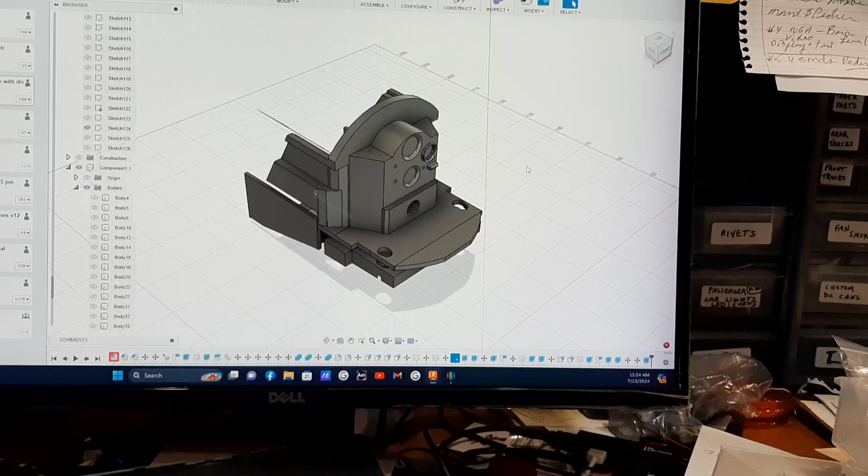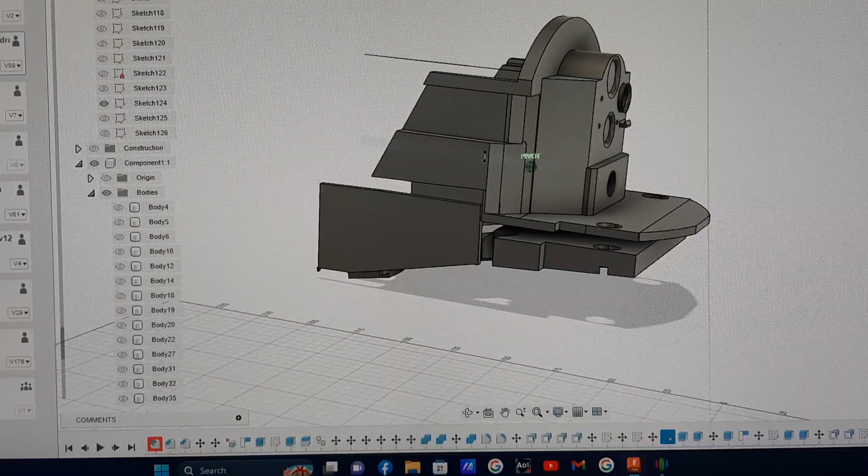Well, I know I say that a lot, but I think I finally got my head screwed on right today, and I fixed the issues, and these are the final pieces, in my opinion. I'm doing a print now, and I'll show you how I had to print it in a moment. But one of the things I had to correct was that the sides of the pan had to go up clearly.

Okay, I mean that's like duh. And I just lost my brain. I don't know what happened.

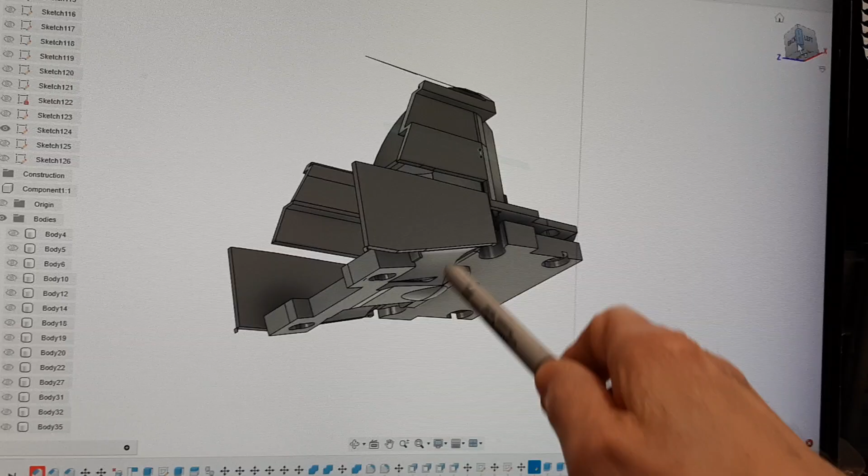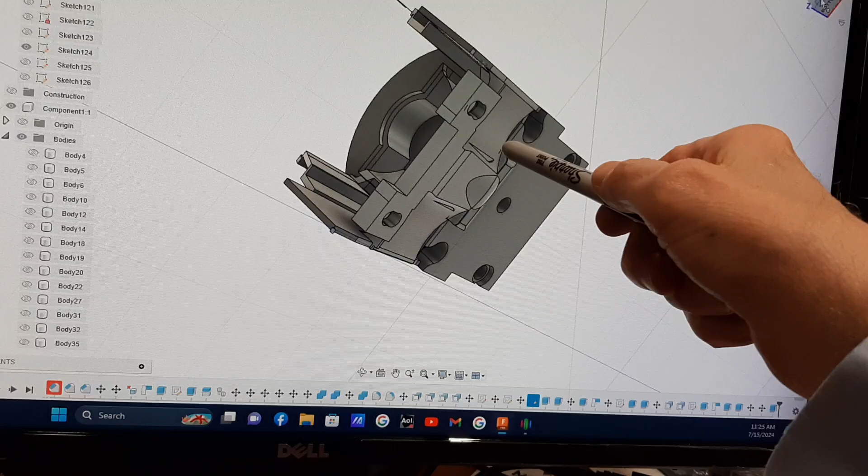So I flushed this edge to the bottom of the pan, and what you'll see with the bottom of the pan are those radiuses in here. These little arcs in here are for the pivot of the wheel. Pivot point is here, and the truck is back here, and the wheels sit here, and they go like this. And the high point is in here, but they'll clear now nicely on the turns. They won't bind in any way, and I'm still covering the bottom of the compartment, which is what we wanted. We wanted it to look like it was the ash pan.

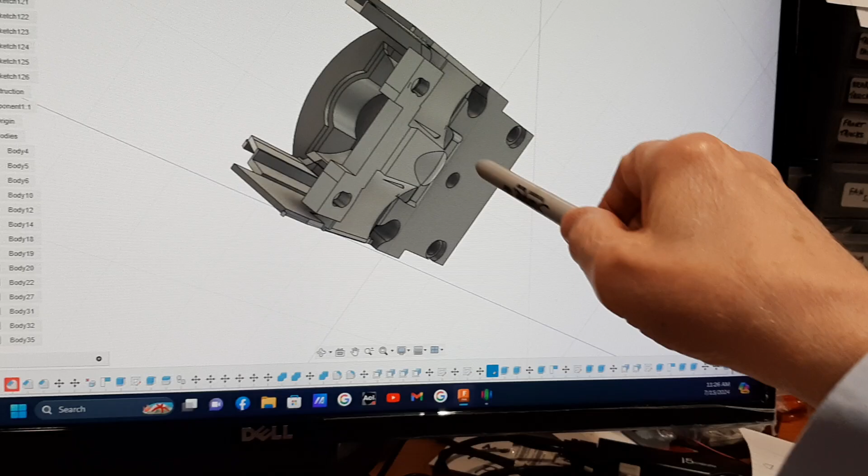The only issue with that was I needed some strength, so I added a beam like a rib or something in here for strength, and I also added a pair of holes out there for the cable harness to come out of this hole and then go forward and plug in. So now I'm looking at, do I need a clamp or something to hold that steady in that time frame?

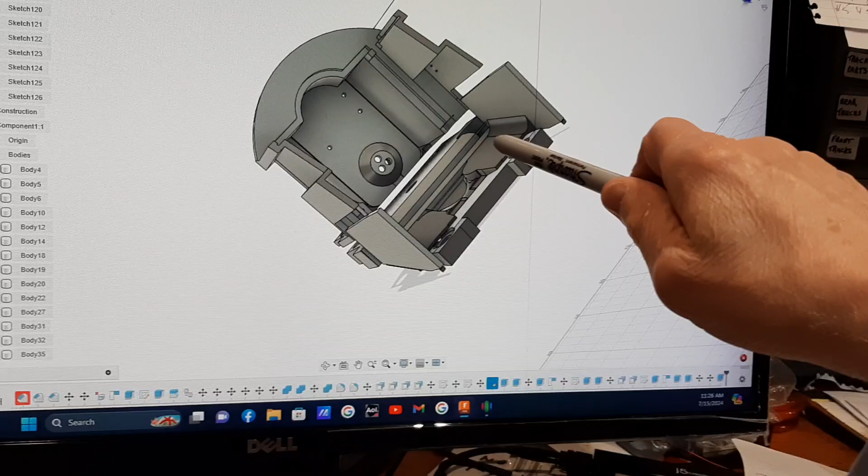Okay, so the plates go up now, and they're gusseted on the inside. You can see a nice bead of plastic there to give that more strength. It's only 1.5 or 2 millimeters. It's not a big plate. It's only for aesthetics, right? It's not holding anything.

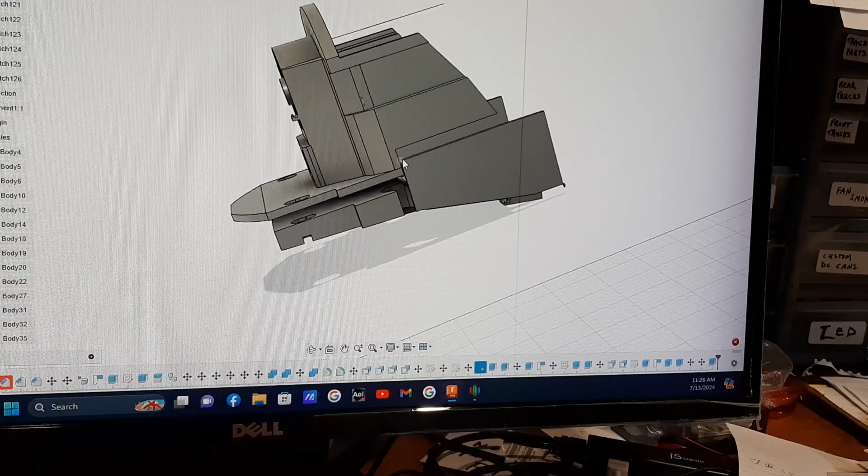Then I had to do some kind of a marriage between it and the Firebox, and I was looking at the lines and where the lines needed to be. And what I decided to do is this line here was fairly easy to line up. It was this line here that was giving me the grief, so I just took a notch out of the Firebox and fitted it into here, and then I did some sort of a match cut kind of a thing. It's where you overlap them and then cut a line, and then there, now you know they got a perfect fit. I kind of did that with this, so they should line up really close.

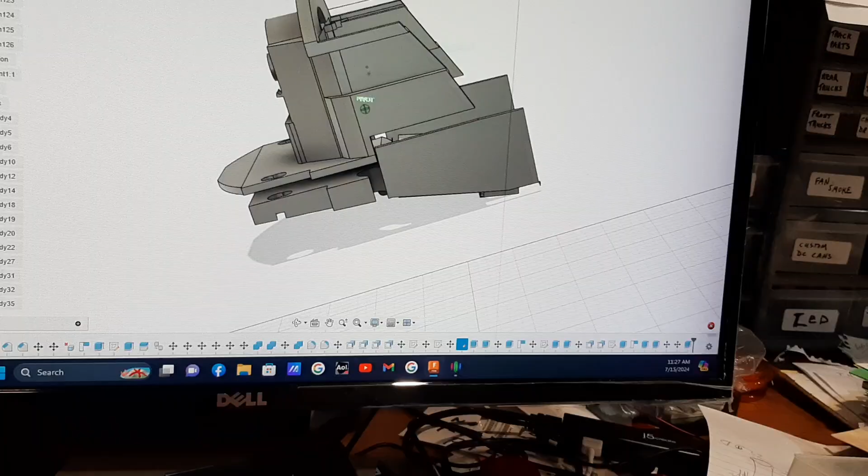You won't see it. It's up under the engine. It's not visible at all, but yeah, somehow it couldn't just be a goofy gap. It had to be, you know, okay. Now that being said, I could lower this window even more if I wanted to. There's nearly no reason. The window height is here to here, and you're not really going to look in and see anything. I did do a chamfer.

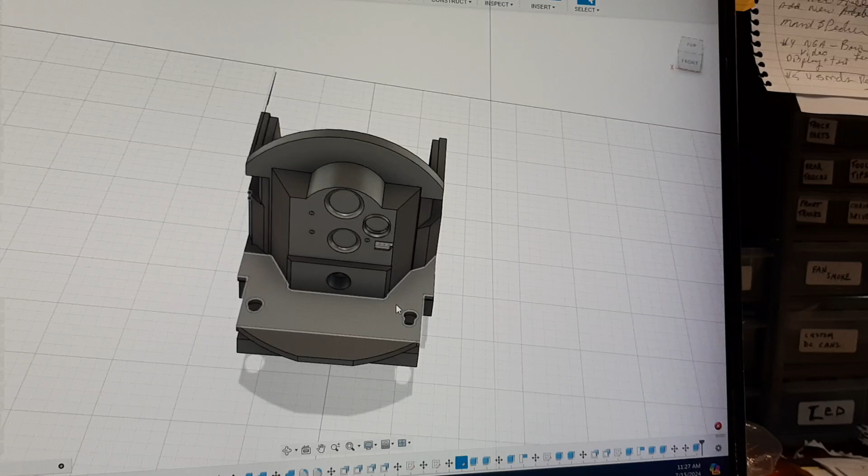Someone's asking about opening up this box, and I pushed it back as far as I could. So there's now more room for the engineer to sit and be able to do some controls and still look at this line of sight. His line of sight is going to be pretty good going out. There's a big window right here and another one behind it, so he's going to be able to see it. But he can also see down, all the way down, and see out the little porthole at the other end. We'll have to get some videos of that to make that clear to everybody, but I think that's going to work out.

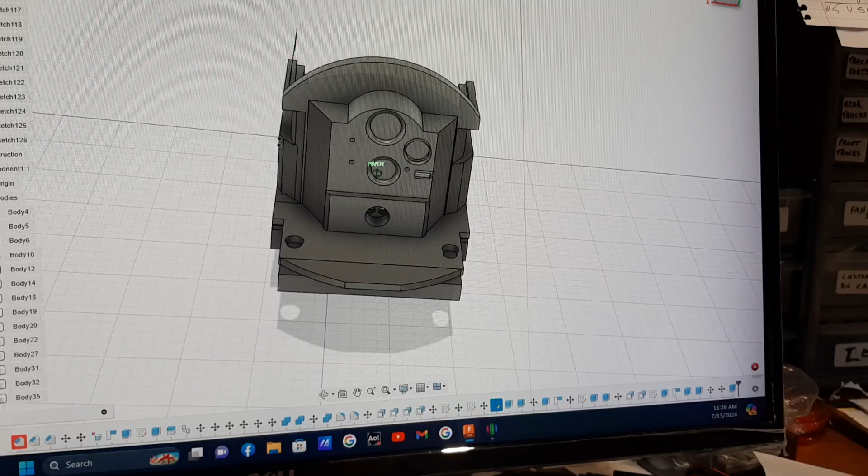So then I left the details. I got this stick hanging off. I can't get rid of it. Don't know what it is. I just ignore it. It doesn't print. It's so small, so fine. I know, a little weird. I've got a few sketch lines hanging out. Don't know why. There, he's gone now. In any case, I think I'm going to be in good shape.

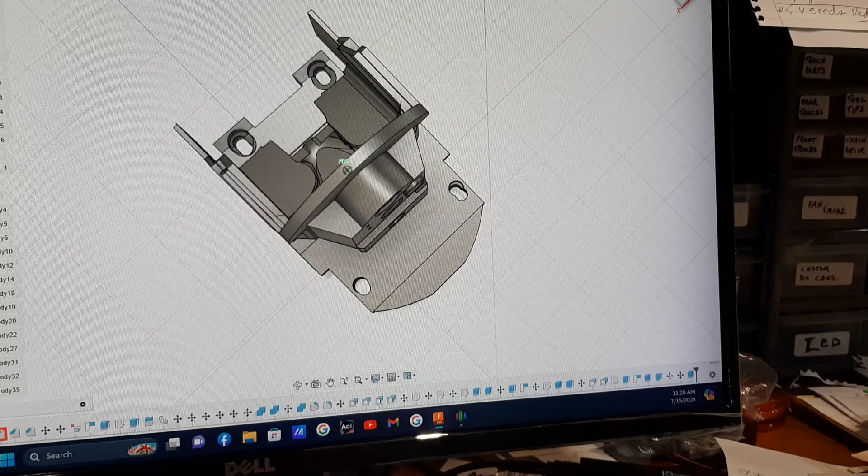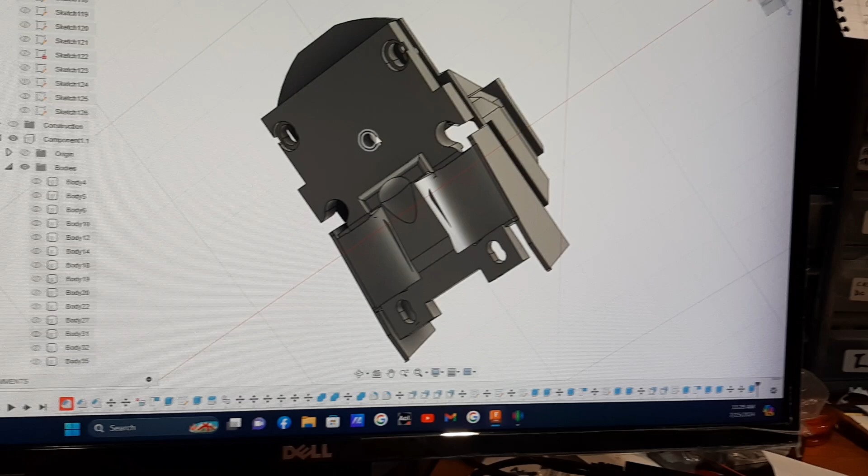I wish I didn't have this notch missing. I probably could shrink that countersink a little bit, and then that would go away, but I'm not sure I'm worried about it. This is the hole for the threaded insert, where you press in that bronze piece and then you bolt your truck to that. And I was thinking if I needed something to hold these down, maybe there was something I could leverage off of that would come out and still offer some pivoting motion, you know. I'm not sure if that makes sense. I don't know.

We'll see. I'm thinking maybe more something that's rigid. Maybe I put a hole here and something that reaches out to either side and just sort of acts like an arm to hold them up. Not too big, not too bulky. Anyway, that's the size of it.

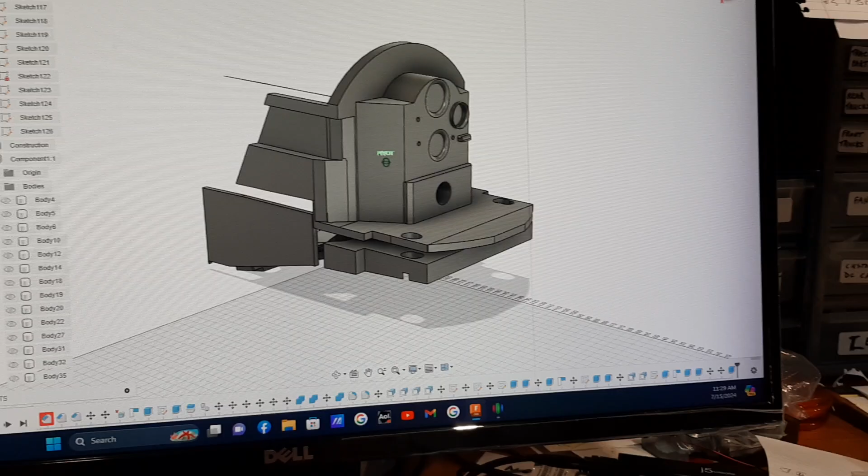So that took a while. In my head, for some reason, I was just struggling. Oh God. At any rate, that's it. It's being printed. On the challenging side, the thing I've been having problems with when I print was the area of support. It's printing now, so you're not going to see it, but I can make it print faster. Sort of just do that.

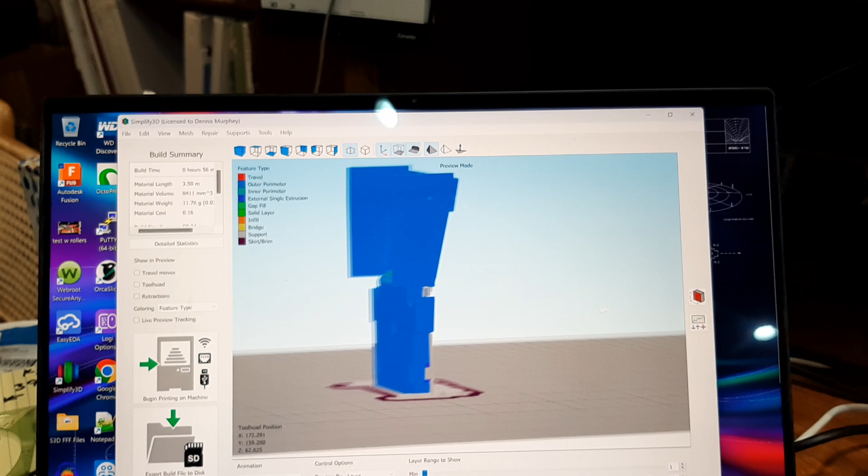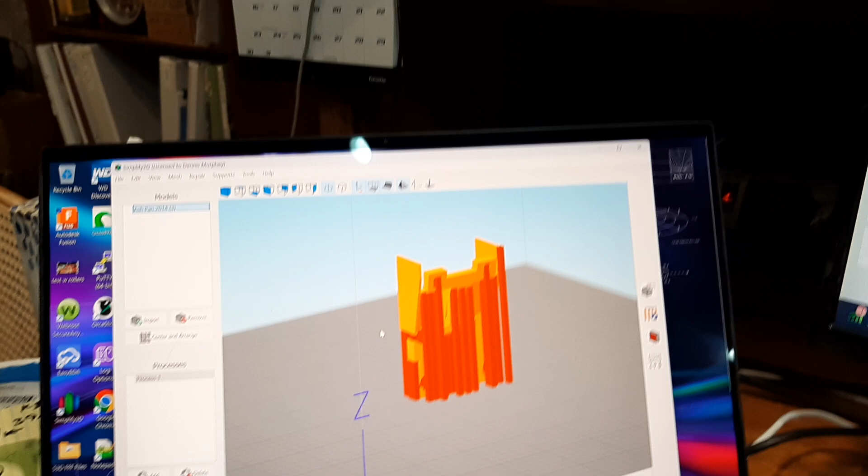And what I've done, and you'll see them, is I've added numerous, well, they're supposed to be there, and they're not showing up. Oh, that's because they're not printed. I'm only showing the part. I should probably get out of that. There we go. So now what I can show you is the whole thing. There's the whole part. And the orange are what we call supports.

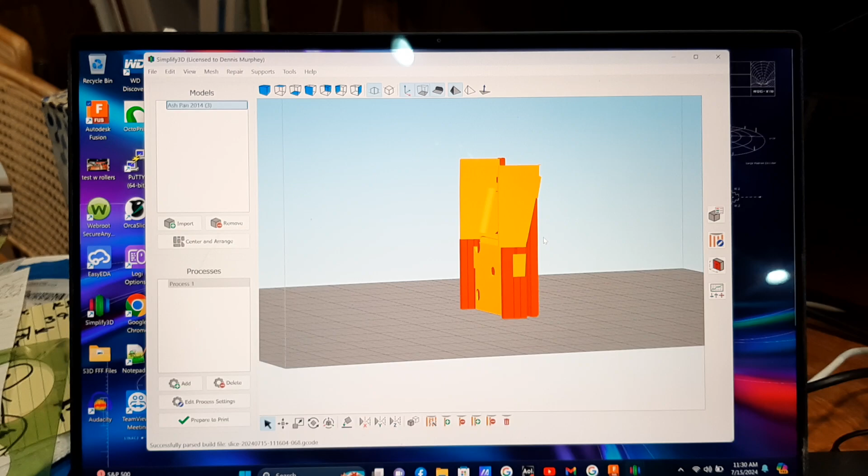I had been printing it flat, and I just was getting terrible finish on this bottom plate because it was hanging over. It wasn't finishing well at all. This plate was coming out great, and this one was coming out poorly. So the machine asked me to put it vertical. I thought about it, and I said, okay, let's look at that. And then I can add supports.

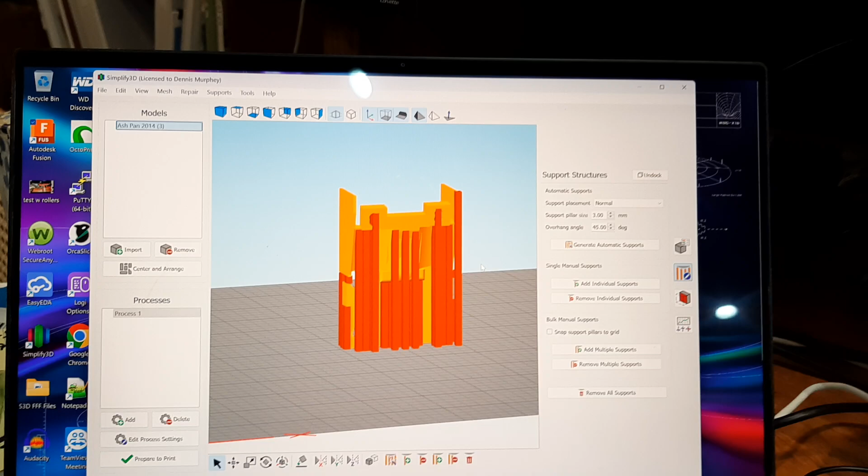There's my support button. And when I do that, I can add individual supports. So I said, okay, you do yours. And then I saw some spots, so I added a few of mine. And I feel pretty good about how it's going to get supported. These are going to be very thin, and they're just barely touching, and they snap off, usually, if you're lucky. We haven't perfected this notion of supports.

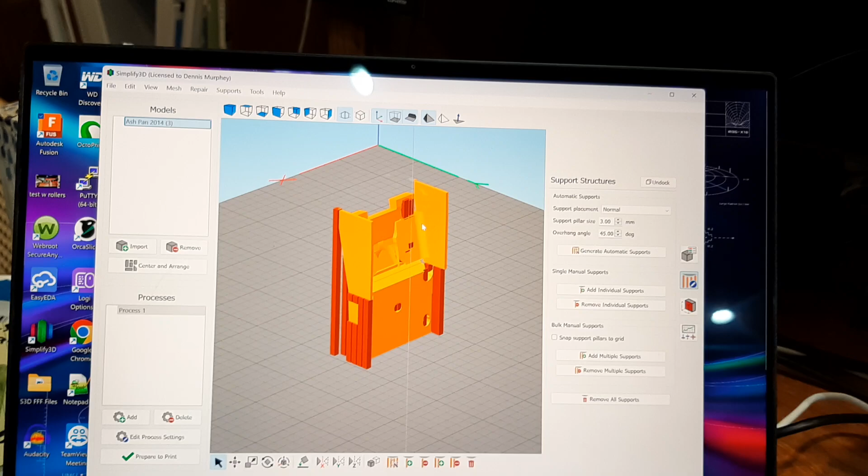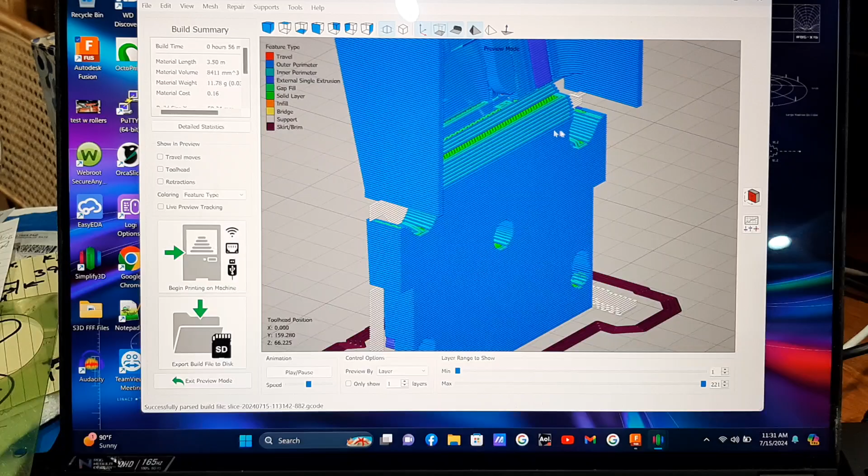These don't require supports because they're going to be overhanging on this other side. So if you don't have any overhang, generally you can print and not have a problem. And when we go to see this thing, there we go. You can kind of see the blue lines. That's how we're going to print this thing. So this is all going to be on top, and it's not going to have a problem. But over here where these lines hang over, they tend to droop and drop down. So that's why these supports are going to be in there to help that out.

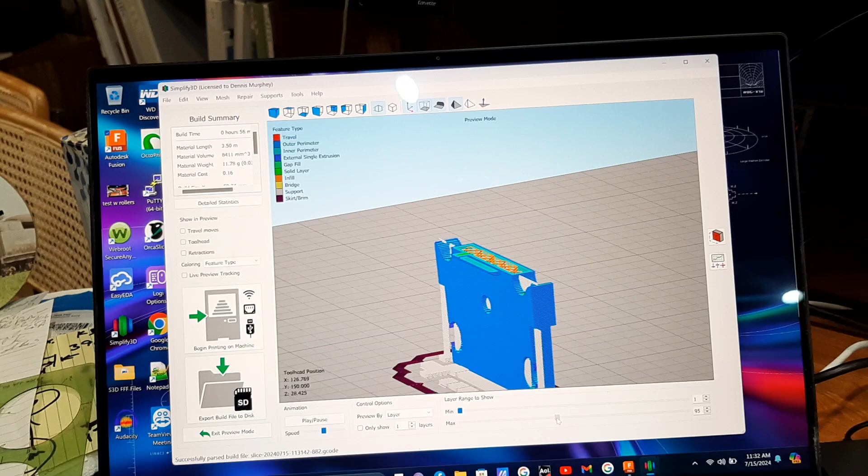And I'm hoping that all the supports print. I'm not sure why they're not shown here. See, they start to show, and some show, and then some don't. I don't know what that is. Anyway, that's the part. I've monkeyed with it, so it's all messed up.

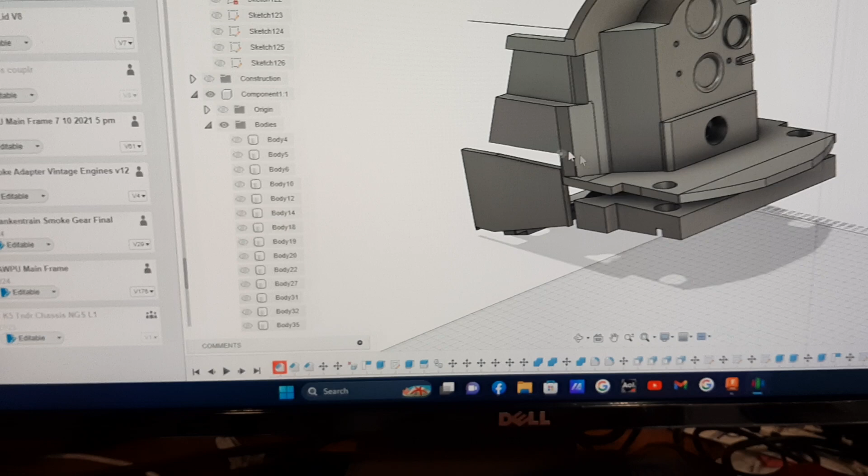And then the lower, I'll print when this gets done. This part I'm working on now is going to take an hour to print. Going vertical seems to have added more time. And so the second one's probably going to take an hour as well. But I think it's going to be pretty close, and it's going to be a lot cleaner printing it upright.

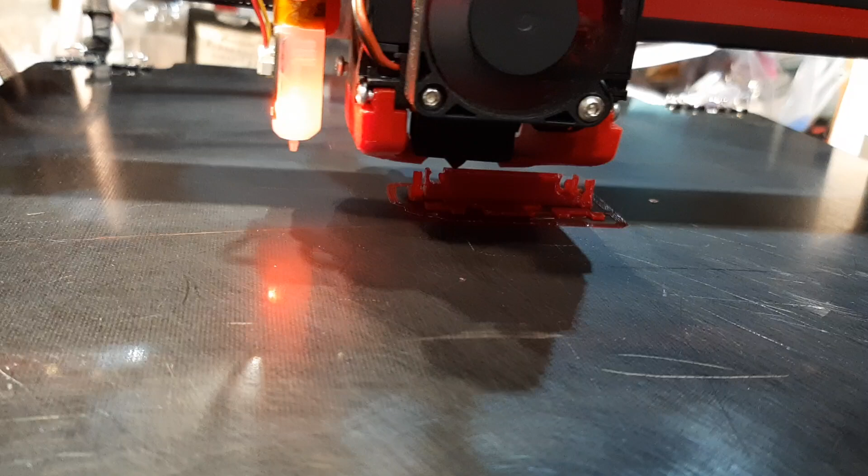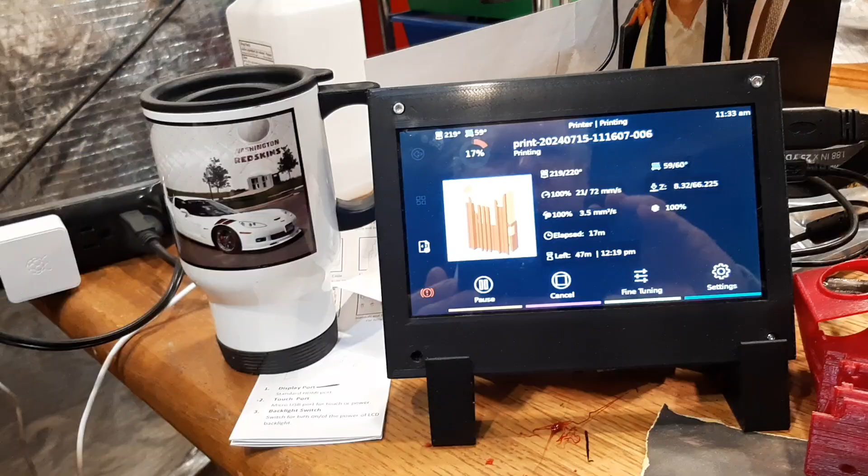You can see the supports are coming online now. See the supports sticking up in the back. But these supports over here stopped growing. That doesn't feel right. I wonder if it thinks it doesn't need them. It can't be that. We'll see what happens. It looks like it's not doing it, and I don't know why. They're here. You see this?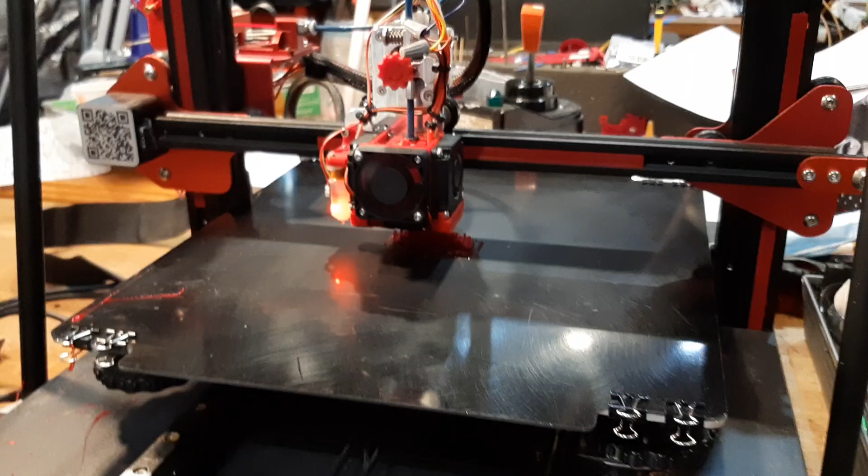All right, having lunch now. Okay. Gotcha, I'll be right up. Yep. 10 minutes. Sorry for yelling.

God bless her. So that's what I got done this morning. I dug myself out. I knew what I had to do, and she gave me an hour. We have a doctor's appointment, so that's why it's a short day. Tomorrow's another short day. Back-to-back doctors.